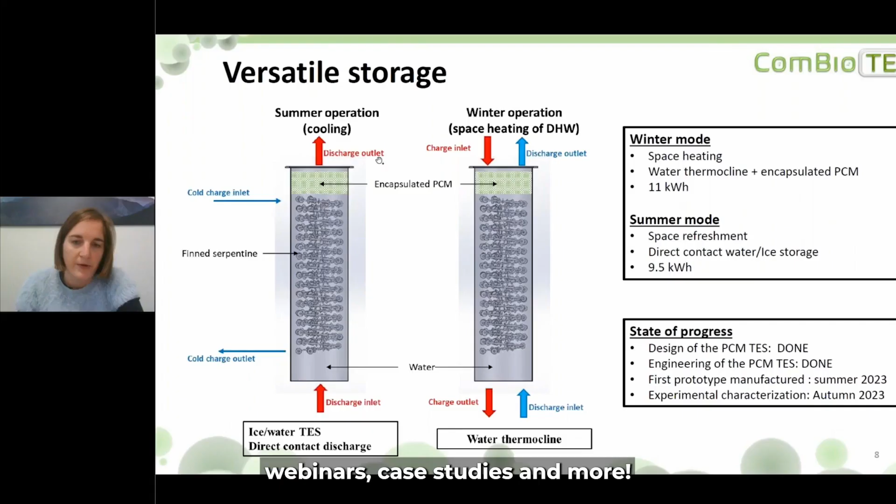Every month we focus on a topic that is key to making Europe's buildings as energy efficient as possible. Exploring that, you can find the latest content such as expert talks, webinars, case studies and more. From architects and engineers to academics and policy makers, we've got you covered. Build Up brings together thousands of registered members to reap the benefit of Europe's collective intelligence on all aspects of energy efficiency and renewable energy in buildings.

The Build Up portal benefits from the expertise of our ambassadors. Drawn from industry and academia, the ambassadors bridge the gap between EU and national level and help shape our editorial content. Want to promote your work? Build Up disseminates your research, projects and events through a variety of channels.

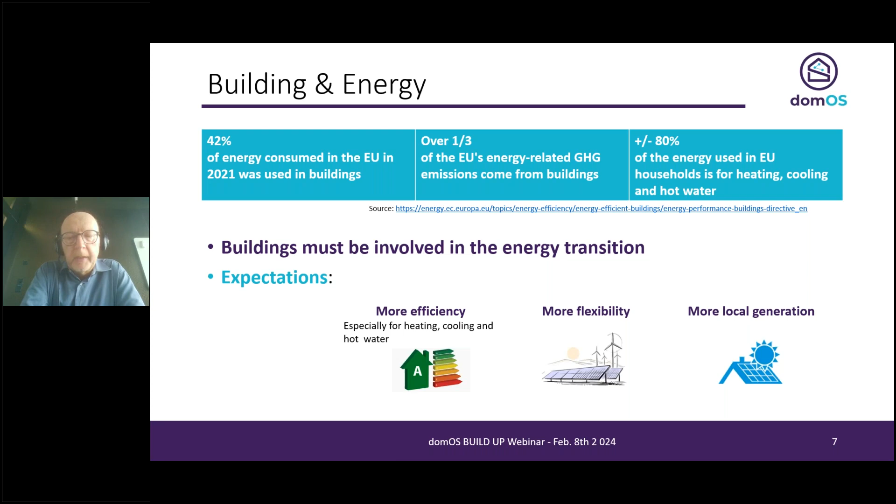Of course, smartness and digitalization is not the whole solution to improve the performance of buildings. Regarding efficiency, of course you can do a deep renovation, but with some smart services you can get significant results in the shorter term and with less investment compared to deep renovation. Buildings can also become more flexible. Flexibility means that we need some kind of conductor organizing local generation, consumption, and storage among the big consuming appliances and producers. And of course, regarding more local generation, this is not an issue for digitalization.

But smart services for efficiency and smart services for flexibility are issues related to digitization.

So in the domOS project, we had two main axes. One relates to the development, prototyping, and test of energy services for energy efficiency and for flexibility. I do not address these points as we have one session for each of these points. And the second axis of the domOS project is technology.

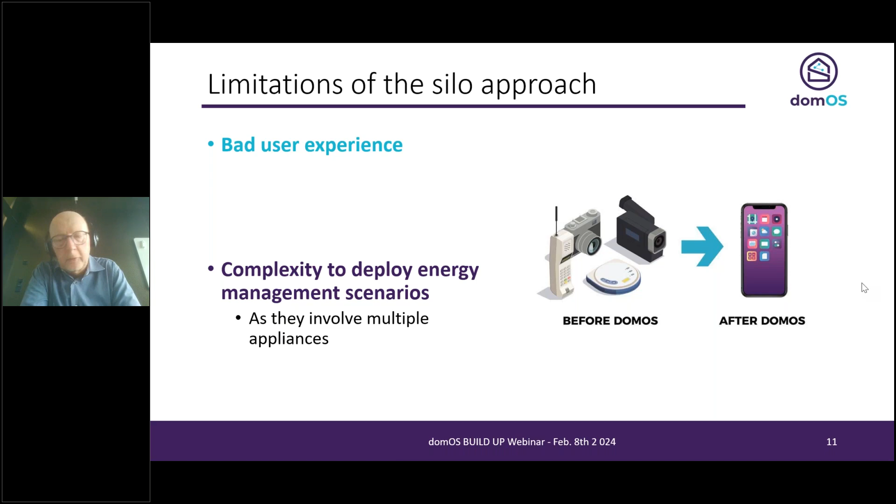Well, what is the limitation of the silo approach? Basically two. First, there is bad user experience, as you have to deal with many applications. And also many services—imagine self-optimization of self-consumption—require the involvement of multiple appliances, and with a silo approach this is not possible. Here you see an example of what we intend to do. We intend to make the smartphone revolution for buildings, to make it simple.

So what we did: we defined a mediation layer between the digital appliances and devices in the building and applications for energy efficiency, flexibility, prosumer information, and so on. By doing this, the applications would interact only with the middleware domOS layer, meaning that in the long term we could have an app store where building owners and building operators could install applications on their building and let them work directly, with the application having no idea about the underlying hardware. Like today, a computer program has no idea of the model of the printer when you want to print a document.

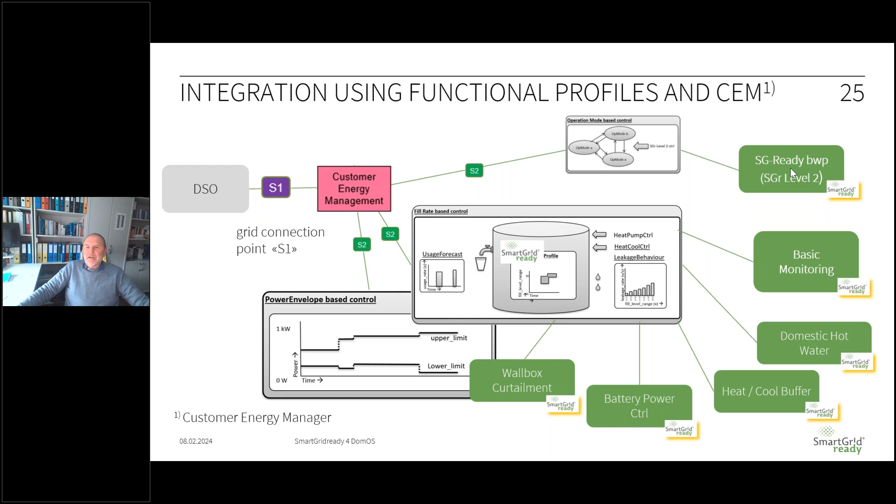To go a little deeper how Smart Grid Ready works, we create devices with functional profiles as shown before, and we create a machine-readable interface description of, as example, a Modbus device. This machine-readable external interface description can be printed in PDFs, can be downloaded, and with our open source software code, we offer that in Java and Python. You can create automatically a device instance for accessing setters and getters for each data point.

And we plan to combine that with domOS. domOS is also enabled to use our external interface description. Could you press the library Smart Grid Ready link, please? Yeah.

You are now in our library. It's library.smartgridready.ch, and you see an example heat pump of Hoval. And if you could be so kind to only let data points being visible, and deselect the left buttons, the blue buttons, please, little bit.

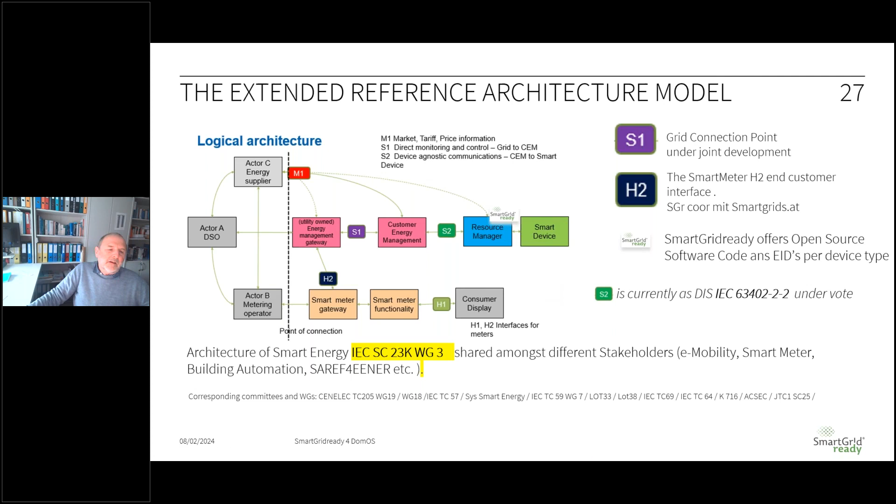I just mentioned SAREF for Energy. It's an ontology created by ETSI, commissioned by the European Commission, and they make tags for appliances, for agriculture, for energy, for smart grid. This smart grid part is connected through the S2 being listed in SAREF for Energy, and we can add plugins to this kind of listing to be part of the SAREF for Energy definition.

The contractor is the European Commission, and the political consequence will be that SAREF will be part of the Code of Conduct for smart appliances. Code of Conduct means manufacturers will be motivated by labels to follow this Code of Conduct, similar to the A, B, C energy efficiency labels we support all over Europe, including Switzerland.

Smart Grid Ready plans to become a plugin for flexibility in this SAREF for Energy, and this may be a future project we could participate in with the European Commission.

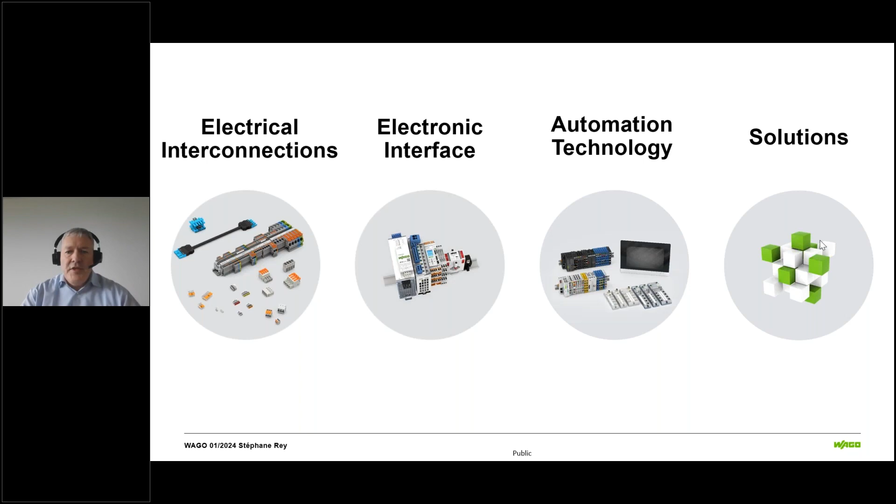From the business unit electronics, we have products like relays, power supplies, electronic circuit breakers, and automation products used in machinery as remote I/O, but also with PLCs and HMI in smart grid and building applications. Last but not least, the business unit solutions builds ready-to-use solution applications like an EDM, an energy data management system.

Let's get back to the subject of the presentation, the industrial deployment of smart services in smart buildings. Our project consists of developing an EMS, an energy management system, for single-family homes with PV production and large consumers such as a heat pump or an electrical vehicle charging station.

The challenge in this kind of project is not technical complexity, but rather the numerous device variants, their deployment on a large scale, and the maintenance of the installation fleet. If we think about thousands of buildings we want to manage, it's a real challenge. The main idea of the project is to use its own photovoltaic production to run the heat pump and recharge electrical cars—in short, a self-consumption solution.

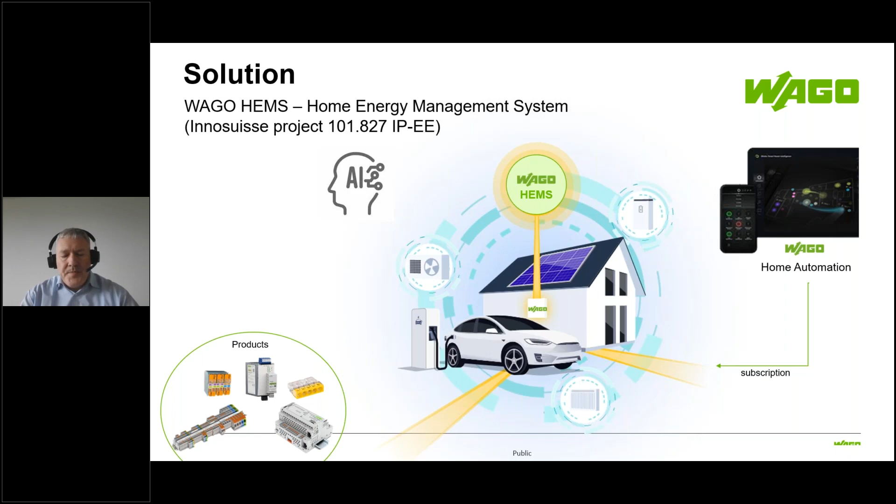Our product vision: the project was launched with the vision of becoming a future provider of a service hosting platform for smart building and smart grid. In a first step, our target is to bring an MVP, a minimal viable product, to the market that will increase self-consumption in small buildings. It's what you can see on the left side.

In the future, we can imagine offering other services, and we have many ideas in mind. You can find some of them on our roadmap here: self-sufficiency application, EV load management, demand side flexibility application, etc.

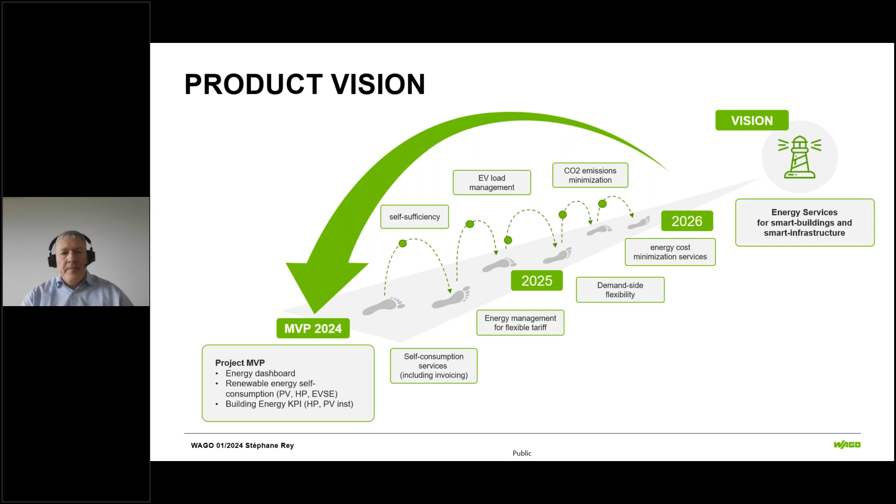I'm going to go a little bit faster and suggest you skip this slide. It shows the current status of our project, and you can comment on it later if you want.

To begin with, here's the topology of our solution. On the field level, you can find appliances like the heat pump - here, as example, Stiebel Eltron heat pump, a PV inverter, as example of Fronius inverter, a WAGO MID meter, or a charging station here, as example, a wall box from Zaptec.

In the middle, these small pieces of hardware is a WAGO CC100. This product acts as an edge device between the field and the external world. On the WAGO controller, device drivers are running for all appliances lying on the field level. The WAGO Linux controller is a single point of information for cloud application, cloud services, and local application, like dashboard or self-consumption algorithm, etc.

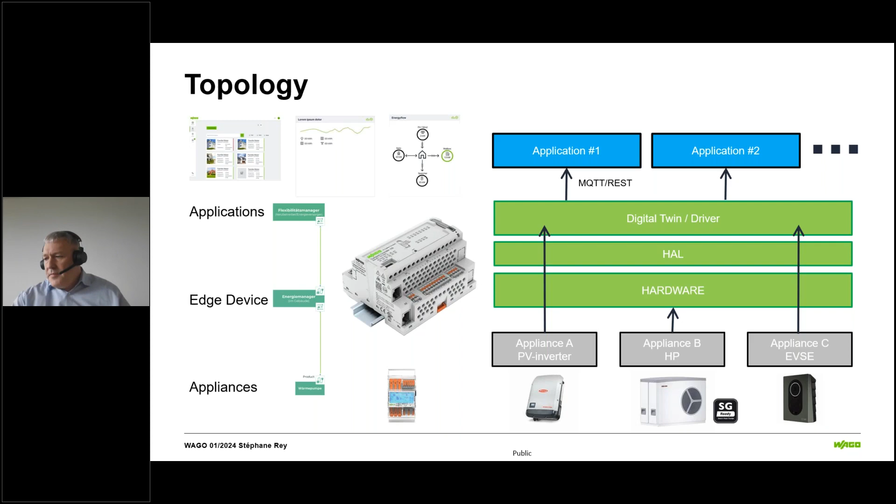Next slide. To simplify and industrialize endpoint deployment, we develop a technology that uses a common information base, the building description. It's the same idea as Frederick showed in his presentation.

Thanks to Docker, we are enabled to deploy specific containers for each type of appliances or device. You can have a look with the arrow that goes to the right side. The building description is used not only to configure appliances, but also applications, and that's the arrow that points to the left side.

The use of building-specific data, like GPS coordinates, the number of rooms, the number of floors, are important data to customize the application for each customer's needs.

To summarize, the building description is a key to a successful large-scale deployment of building drivers and customer applications. I'm already at the end of my presentation. I was a little bit fast.

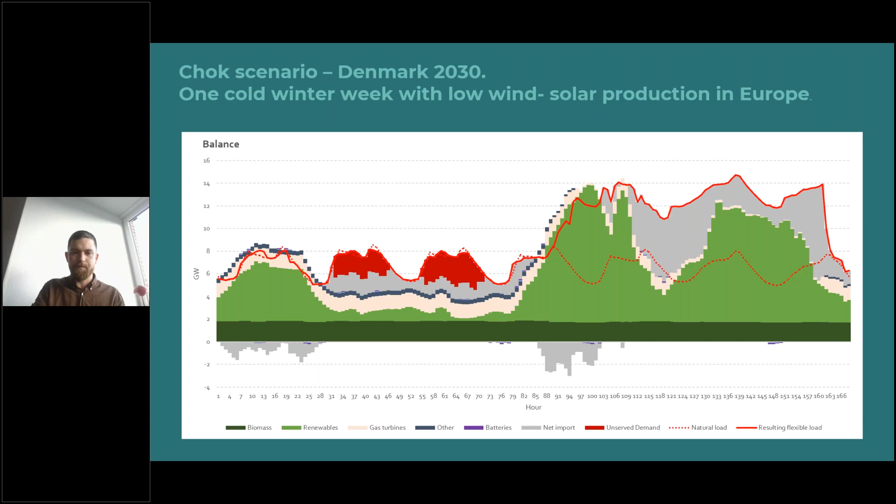What happens from a security of supply perspective if we turn the knob on flexibility? This is a simulation of the same scenario, just with flexibility turned on. You can see that there is less unserved demand in the energy system—the bright red chunks are decreasing, and that's a result of 10% extra flexibility from companies and industry.

They've become more price flexible. There's 25% extra flexibility from data centers and their power consumption, and vehicle-to-grid capabilities where 20% of each EV is capable of using vehicle-to-grid. This shows that if you just turn the knob on flexibility in these simulations, we will have a more secure supply of electricity in the system. These aren't simulations of what happens with buildings specifically, but what happens if you do something about flexibility—for example, in buildings, data centers, and vehicle-to-grid. This is an example of how flexibility is a fundamental component of security of electricity supply.

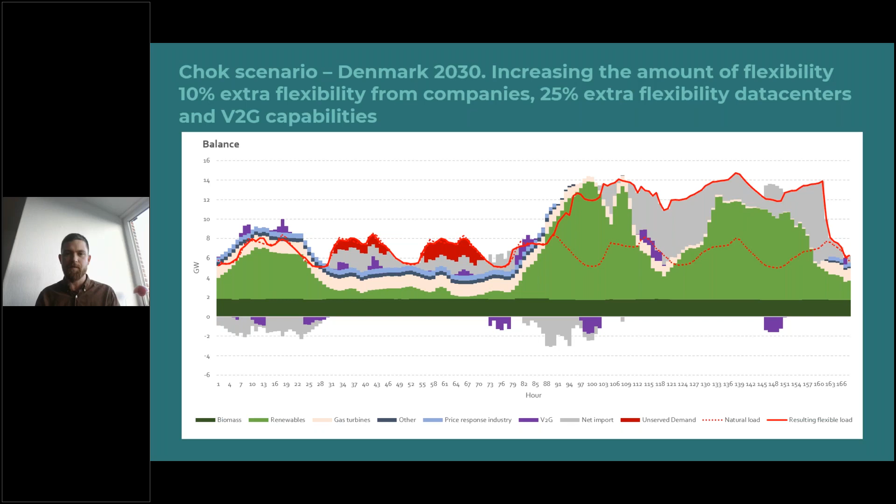So in a power system with increasing demand and fluctuating power production, we need to switch from managing power production to managing power consumption, otherwise ends can't meet.

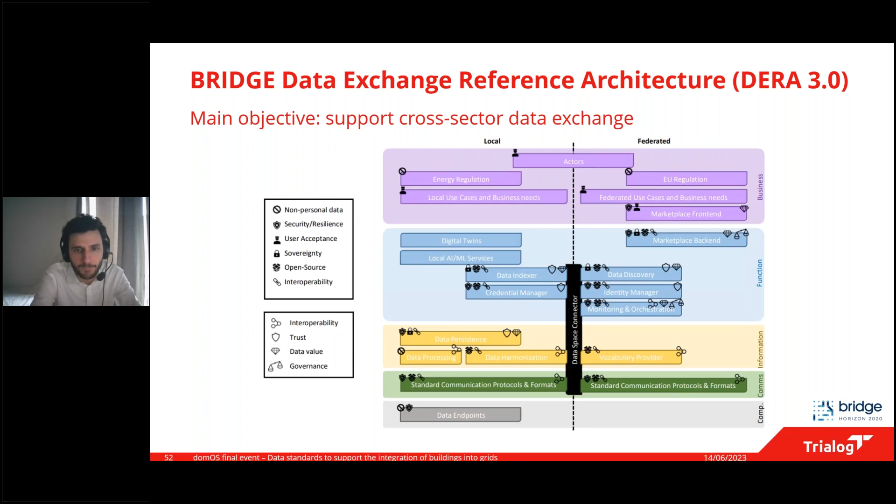Besides that, we have other initiatives. One is FlexOffer. It's already been mentioned by partners because it was used in domOS - FlexOffer is a common generic core with possible application-specific profiles to support flexibility. It's been used by more than 15 projects, starting from Mirabel, and also TotalFlex, Fever, GoFlex, and now domOS and Gift and others.

Recently we created a FlexOffer user group, about 1.5 years ago, with the objective to maintain the FlexOffer specification and promote its use. We currently have 54 registered participants. It's part of the Flex community, and we've already released the specification as open source. We're really looking forward to more people participating to contribute to the development of FlexOffer to make it an industrial reality.

When we look at standardization, we all know that there are many existing standards, and it's sometimes hard to know where to go and what is relevant. So some time ago in 2017, a smart grid roadmap was established. It's currently being updated and is freely available on the website from the IEC System Committee Smart Energy. The main idea is you have a description of the system, and subsystem by subsystem, you can click on it and get the list of available standards, as well as coming standards under development, plus SGAM diagrams mapping existing standards, so it can help you identify which standards are relevant and where to use them.

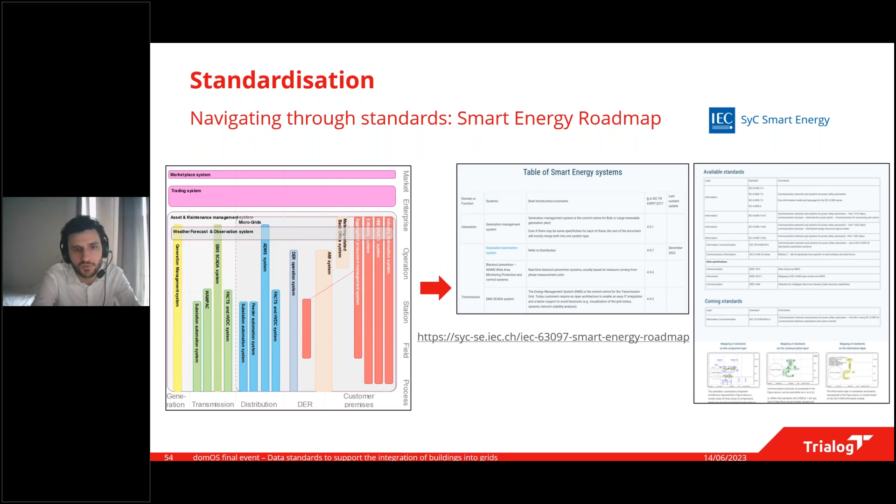We have cross-sector use cases defined, and now we are demonstrating cross-sector integrated systems. We have data models and ontologies, and now we want to achieve standards that enable semantic interoperability. We have this data exchange reference architecture, we have the data space, and this will lead to harmonized data exchange architecture and procedures. We want to leverage existing and future standards, and thanks to this smart energy roadmap, we know where to look. We also want to support industry adoption, and for that we have user groups and feedback loops from the industry and users of each technology.

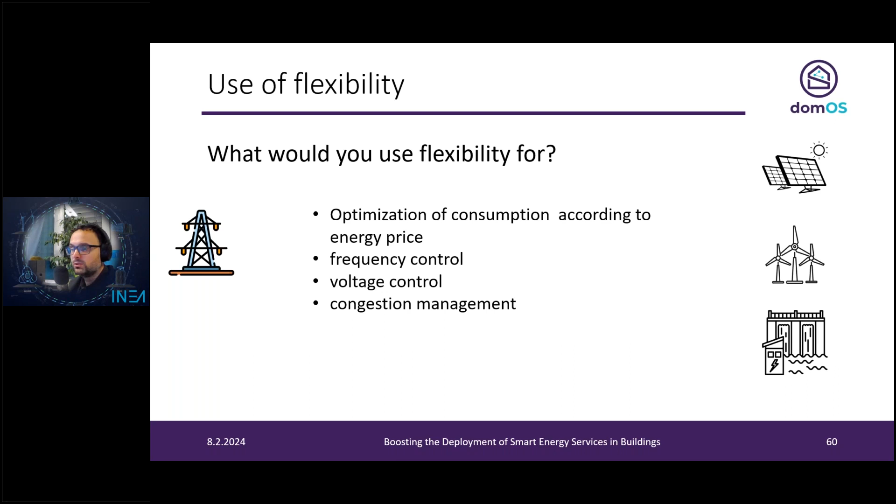Next, we need to somehow connect this flexibility. We need to communicate with it, measure it, and control it. And here comes the domOS solution really handy - it simplifies a lot the integration of such assets.

One thing to consider is the individual building flexibility is really not that big, and the IoT devices used for this should be as cost effective as possible.

Now that we have monitoring and controlling of flexible devices, we also need to somehow orchestrate them. These control devices send measurements to a flexibility agent, and combined with user settings, they generate flexibility offers - flex offers, which were also already mentioned a few times today.

Multiple of these flex offers gather in an aggregation platform. On the other side, the grid also provides its own flex offer, but with the main difference that it's not offering flexibility, but asking for it. Then the optimization algorithm tries to find an optimal solution, and based on this solution, the control devices are controlled to extract the flexibility from them.

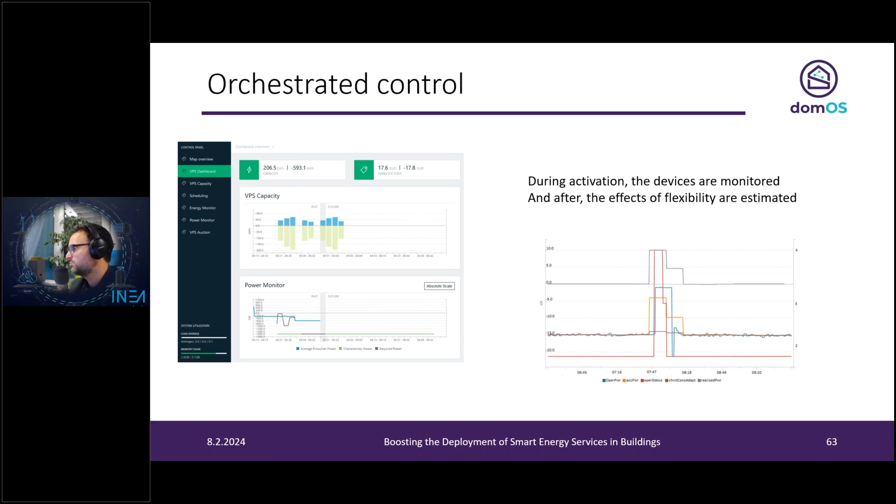Hello. Hello. Is Oliver still here? Yes, I'm here. Yes, okay, perfect.

So while we're waiting for questions from the attendees, I prepared some questions of my own. First, for Mr. Bech: what are some key future features or technologies that enable buildings to become intelligent in terms of energy management and optimization? The main focus, of course, being that we will be able to adapt consumption to production, to make this transition to control consumption. So the question is, which technologies will be the main drivers?

I can speak from a Danish perspective and from a systematic view for the energy system as a whole. In a Danish context, we expect that 1.5 million EVs will join the roads by 2030. The flexibility in the Danish context will mainly come from vehicle-to-grid capabilities. Then from district heating - we have a huge district heating system in Denmark, with a lot of district heating connections, especially in the big cities.

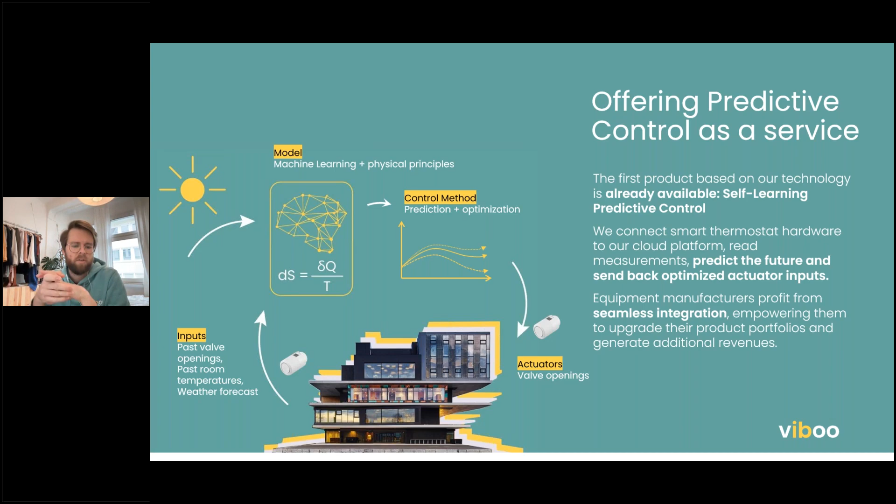I've brought two examples of buildings where we got these algorithms into work. In this building, we replaced 140 thermostats with smart thermostats, coupled them to our cloud platform, and it's now running for the third year. We are saving 30% of energy, while most occupants claim that their comfort improved or stayed the same.

In this building, we save about 6,000 francs of heating costs per year, while charging subscription costs of about 1,800 francs. So 2/3 of the savings stay with the operator of the building.

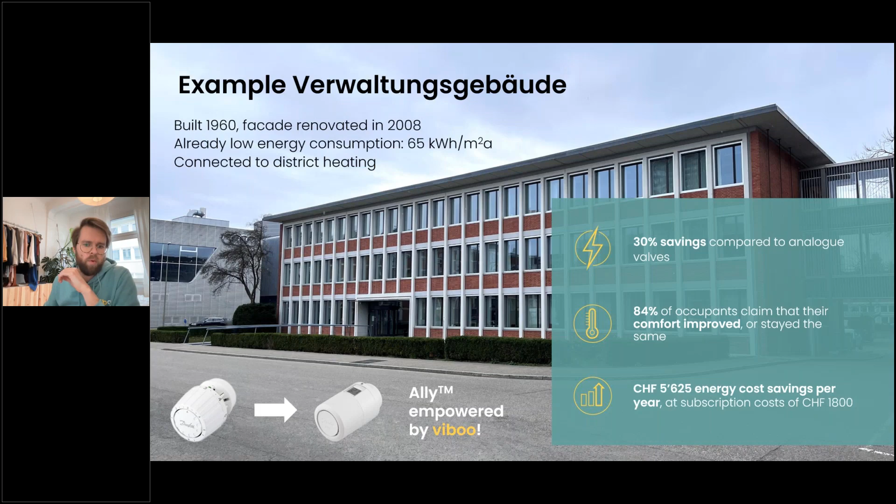So how do we sell these projects or the technology? We basically offer end-to-end projects. Together with the customer, we select the building, organize the purchase of the hardware, organize the installation—we even have our own installers for smaller buildings, or we work with partners. Then we connect the thermostats in the building to our cloud, and 1 to 2 weeks later, after our algorithm has learned the thermal behavior of the building, the customer saves energy.

These are the advantages of our technology on one slide. As the end customer, you get 20 to 40% savings in your building, while even improving comfort. Our technology also allows extended reporting—we can do reports of already achieved and future energy savings, and give the facility management maintenance suggestions. With the data in our algorithms, we can analyze whether the hydronic balance is correct in a building, or if there's something wrong with the supply temperature, and many other features.

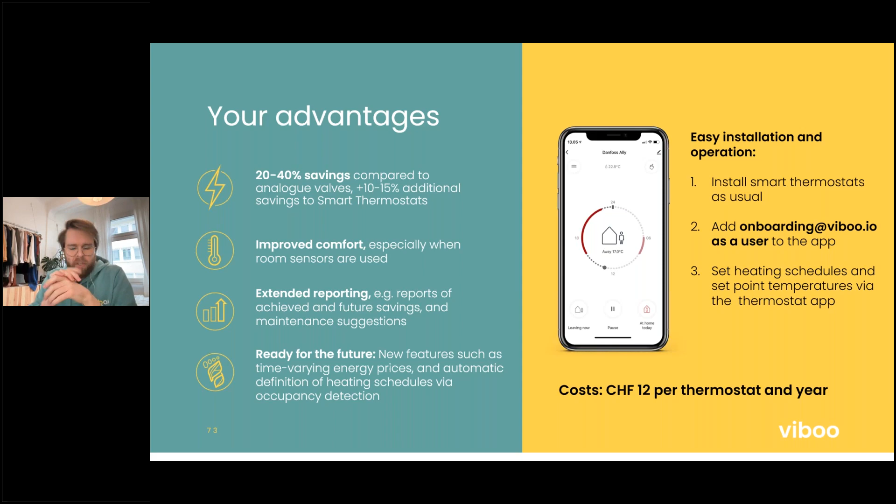We are also ready for the future. We've heard a lot about flexibility and flexible buildings already in the presentations before. We can use our technology to provide flexibility with buildings to the grid without hurting the comfort in the building, because we understand exactly the thermal behavior of the buildings. So with our technology, we can maximize the flexibility while keeping the comfort, because our models know exactly how much flexibility can be offered in order for the comfort to stay in a certain range that we or the customer can define.

So with that, I think I'm in time, already at the end of my presentation. I'm looking forward to the discussion at the end. Thank you.

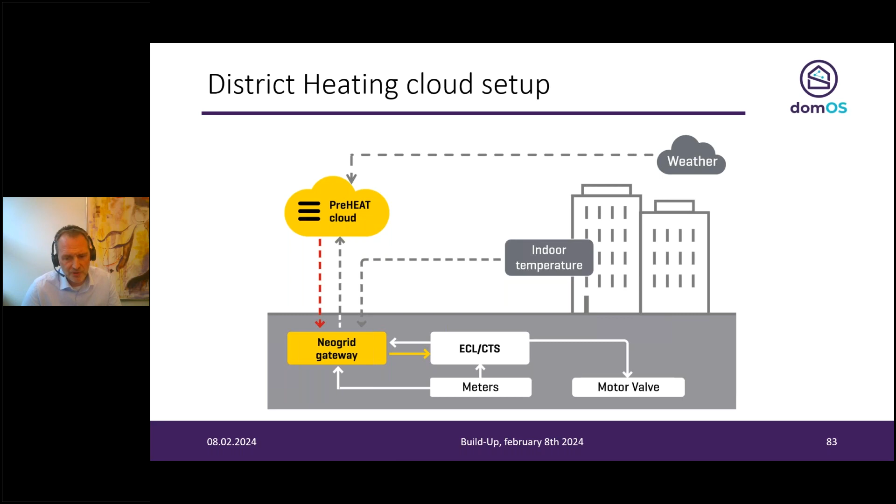Our primary segment is the social housing sector, but we also provide services for the municipal sector - institutions, schools, and kindergartens. We also focus on complex buildings, where we have ventilation systems, cooling, and room heating playing together. Our focus here is to deliver the optimal indoor climate at the lowest cost.

Yes, it worked. Via data, we learn how buildings consume energy. We do that by measuring the amount of energy delivered to the building and the indoor temperature that the energy translates into. Then we have the outdoor weather of the building, and we train a thermodynamic model of the building to see how it consumes energy. If we then have a weather forecast for the next 24 hours, 48 hours, whatever, we can forecast how much energy we need to put into the building and at what time, in order to achieve the desired indoor temperature.

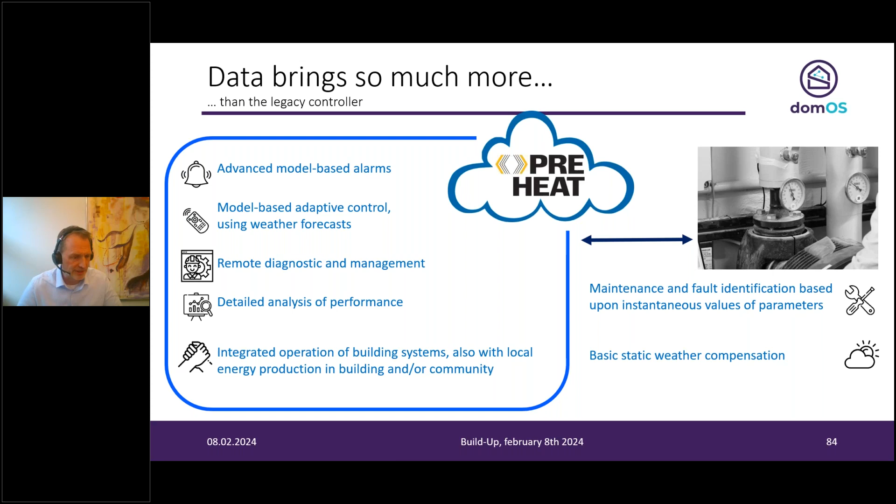Compared to standard heating curve controllers, this approach has superior results. For a given building, we constantly document the performance of our controller. Compared to a baseline without our control, our service provides energy savings in the range of 15%. On top of that, we provide a number of KPIs regarding how the building is operated and how it's performing, but also with a focus on the cooling and the return temperature of the district heating system, which is important for the district heating companies.

We are an add-on to the existing building equipment, the BMS controllers or other kinds of controllers. That means we reuse as much as possible in order to lower the installation cost.

Typically, we obtain savings, as I mentioned, between 10 to 20%. We typically see 5-degree lower return temperature from the building back to the district heating network. And our installations in total have a return on investment of 2 to 3 years.

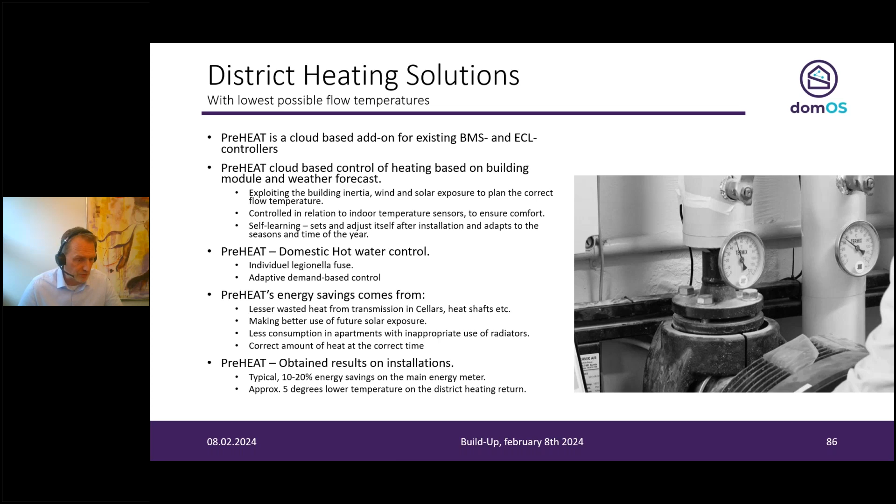Within the domOS project, we extended our service with the district heating companies, adding a local mixing loop supplying a cluster of buildings. Transmission temperatures were dynamically controlled and lowered from 80 degrees to 55 degrees centigrade, minimizing the distribution circulation loss, with the aim also to investigate how buildings were performing in the future low temperature district heating system.

I will now switch to Christian, who will take this to the next level.

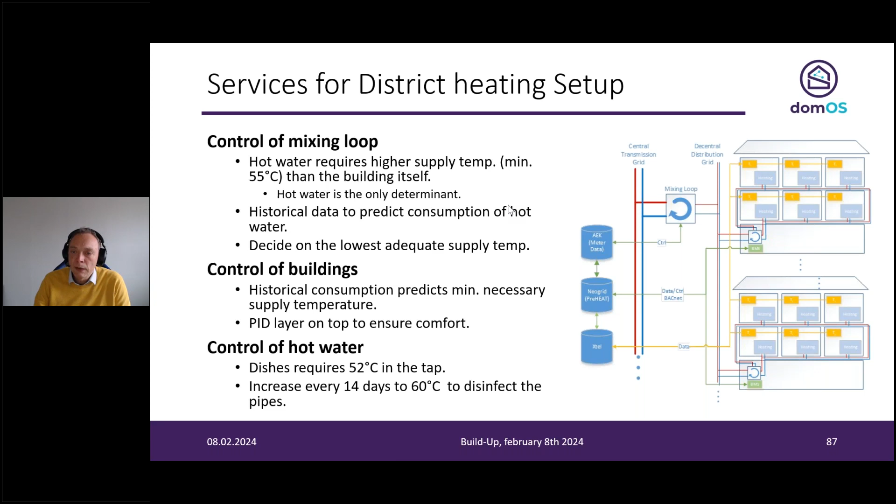I hope you can hear me, and hopefully I'll be able to control the screen. As Henrik just mentioned, I'll shortly tell a bit about the results from this domOS project that we worked with.

So for the tenants, what did it mean for them? They had a decrease in energy consumption and experienced a lower tariff for the district heating system.

For us as a district heating supplier, we experienced this lowering in the supply temperature, which also led to a decrease in energy demand. It increases the lifetime of our service pipes, and it's really optimal for the green transition, where we need to change from fossil fuels to renewable energy, looking into a more electrified district heating production.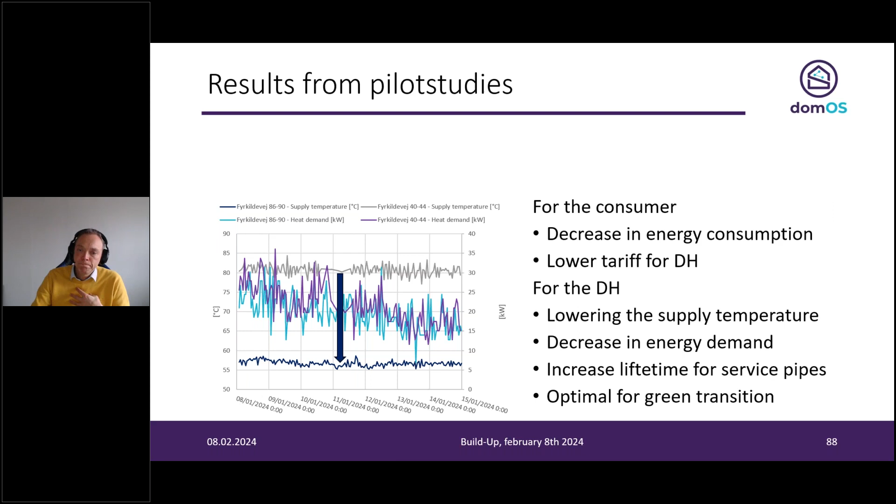If we look into what this means for us as a district heating supplier, just by reducing the temperature, we experienced that in this area, with around 500 meters of pipes and service pipes, we could reduce heat loss from our district heating system by around 20% when reducing from 80 to 60 degrees.

If you extrapolate this result to the entire grid, we find that for each degree we can reduce the supply temperature, we actually reduce the heat loss of our system by 1.1%. So just by lowering the supply temperature by 1 degree, we can save a bit more than 3 gigawatt hours. And of course, if we lower it by 2 degrees, we can save double this amount.

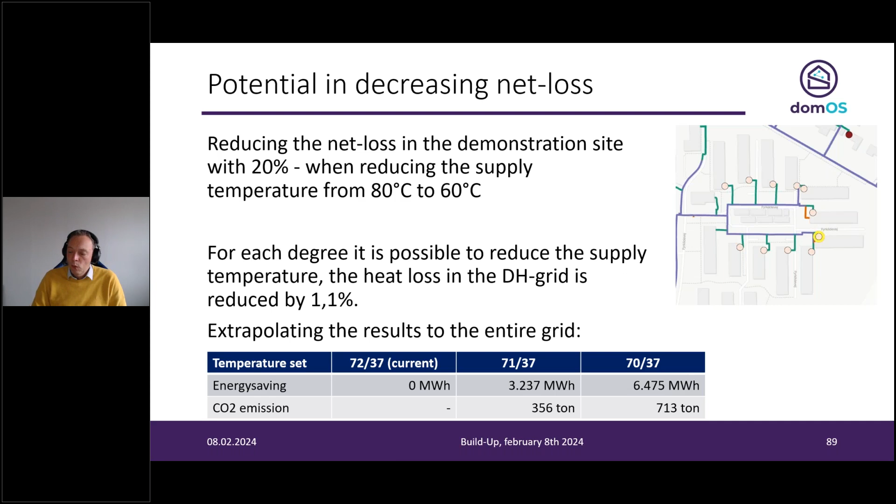So how are we able to do this? Looking into the future, how can we use the flexibility in our district heating system? We look into how to make smart production, smart grids, and smart buildings, and where to integrate these - where we have the coherent places where we can find something beneficial for both the consumer, the buildings, and us as a utility.

Today, right now, we experience the energy savings. We have remote read meters, so we know what our consumers use every hour. We rent out district heating units. So tomorrow, or in the next day, as Henrik told, we will be able to remote control these units. We can use AI to figure out how to control them. We will be able to integrate the building and building designs into the distribution system, into our district heating system, and look into delivering comfort instead of just selling kilowatt hours and hot water.

Someone asked about how we can reward this flexibility in the system. This is probably some years ahead, but when we look to the district heating system being 100% renewable and electrified with lower temperature, we look into the possibilities of time shifting the consumption at our consumers.

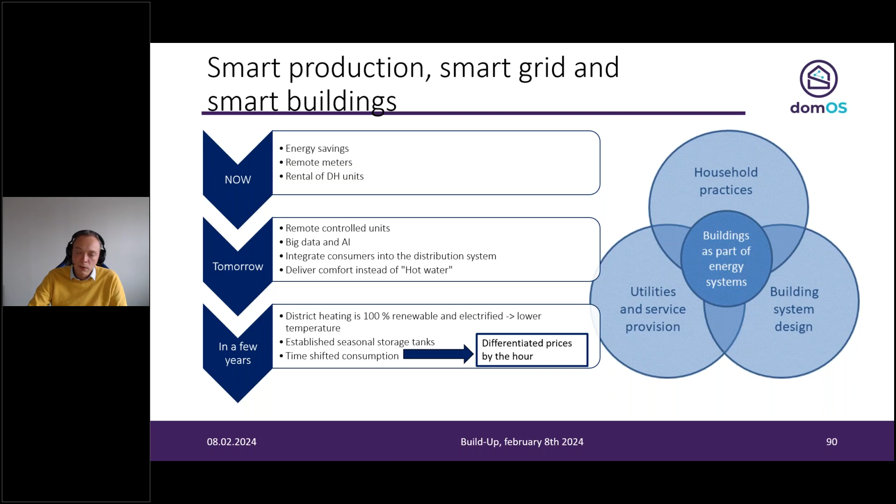How do we integrate this into our products? At the moment we rent out district heating units, and if we can send a signal to the district heating units, or to a company like NeoGrid, we can time shift consumption - for instance from 6 to 9, when people take a shower and close the radiators - and move that consumption to before and after, allowing us to peak shave the consumption and remove some of the peaks.

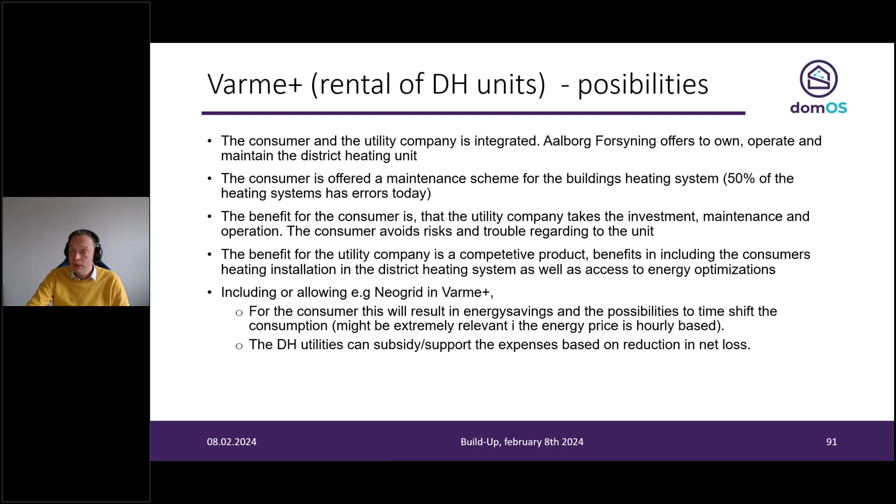The peaks are very expensive for us, both to supply and also to build the production sites needed to supply this peak demand. That's everything from me, and I'll give the word to Yves, who will have the last presentation.

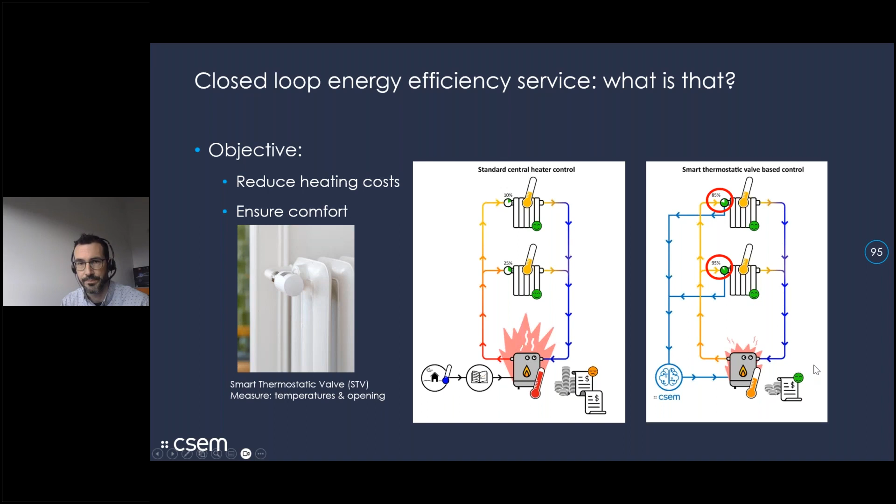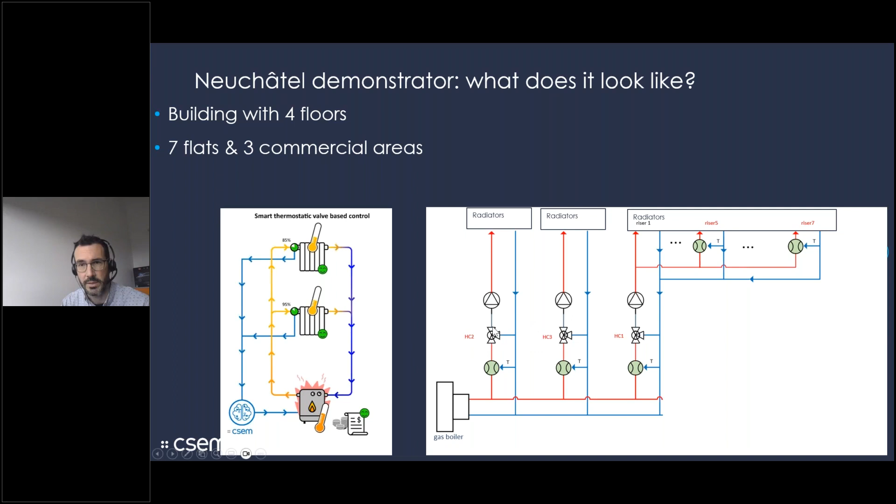In domOS, where did we test that? It's a test site in Neuchâtel. I'll try to link what I've shown before with how the test site looks. It's equipped with one big gas boiler to generate the heat, and the interesting feature is it has 3 independent heating circuits, which allow us to compute for 3 - it's as if there were 3 buildings connected. That makes our test case way more interesting because we get 3 buildings for the price of 1, and all that feeds around 70 radiators.

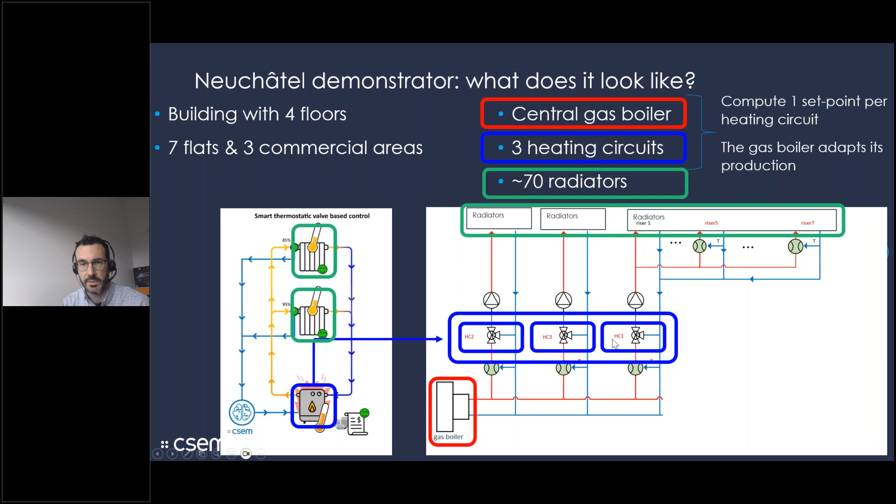It's a quite big building with 7 flats plus some commercial areas on the ground floor, with one big heat generator for the 3 heating circuits. We compute set points or values to be applied at the heating circuits, and then the gas boiler adapts and lives its life as it should to satisfy the needs of the heating circuits.

What are we using to do that? Most important are the smart thermostatic valves - we started with these, from the brand Hora. Then we moved to another one, the Vicki, which has the advantage of talking over another network that doesn't require us to add gateways, which are not always convenient. So we can now live without this.

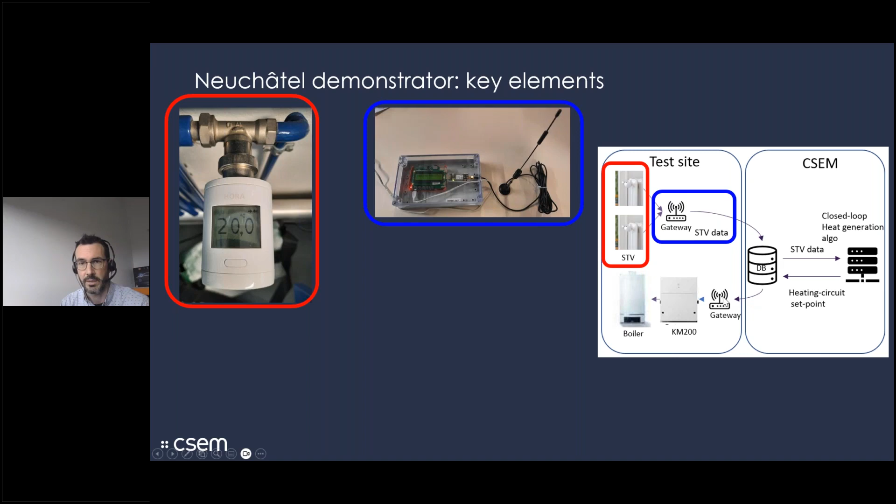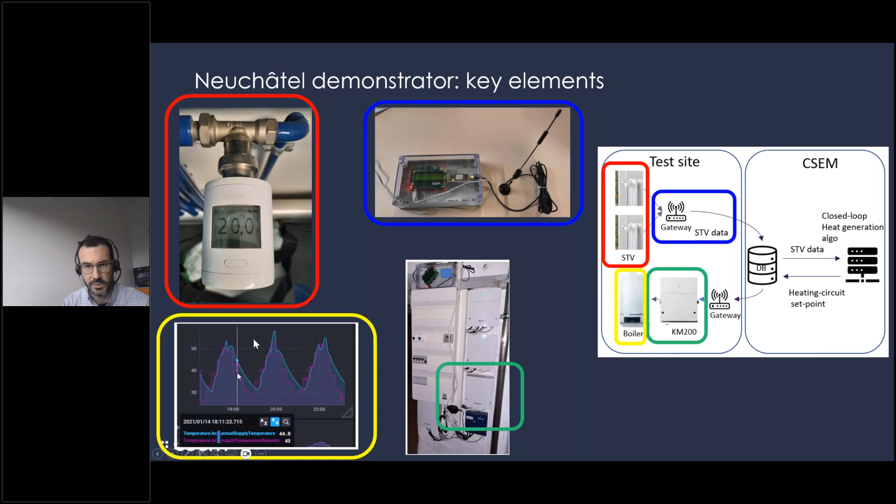This information then goes to CSEM, where we do the math and send it back to the gas boiler. In that case, we had to install a small gateway to talk to the gas boiler. Here's a small print showing that we can actually send commands to the gas boiler and it reacts as it should - that's always a good sanity check to make sure we can actually do what we want.

Then, what did we learn during the project? So these are results that we generated during the 21-22 heating season. And all the plots that I show have the same logic.

On the bottom axis here, you see the average outdoor temperature over one day, so each point is one day. The red is the baseline, operation as usual. And the blue line is our domOS solution, or in that case, the closed loop energy efficiency.

Here we see the supply temperature that would go to the radiators, and for riser number 3, heating circuit number 3, it was decreased on average by 5 degrees quite consistently, and people were still happy. So I put it as green, that's what we expected.

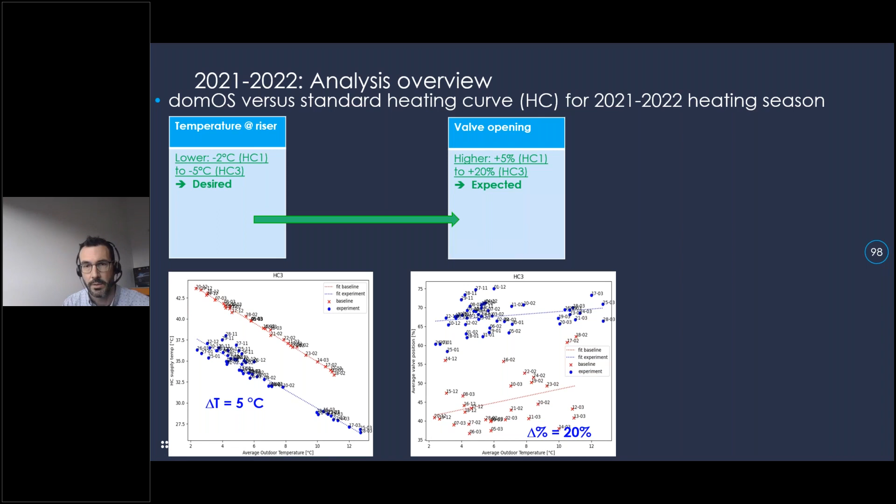Then if I move closer to the radiator, this time it's not temperature I show, but the average valve opening for a flat, or actually all the flats connected to that loop. The opening of the valve went from like 40-something percent on average to 65. That's also something we wanted to see, because since the fluid is less warm, the valve needs to be more open to throughput the same amount of heat and keep people happy inside.

Then the last thing we saw is that the energy at riser level was equal for the two risers, which is also not surprising, since at the end of the day, people still need the same amount of heat to be happy.

Our motto is that we can drive at a lower temperature, so we have a better efficiency at generation. The good thing is that on riser number 3, we even had a decrease of net energy of around 13%. I put it as not expected, because the energy should be the same, but actually the insulation around the pipe was so bad in that case that probably by lowering the temperature, we drastically reduced the losses in the piping, which probably explains this unexpected saving on this riser.

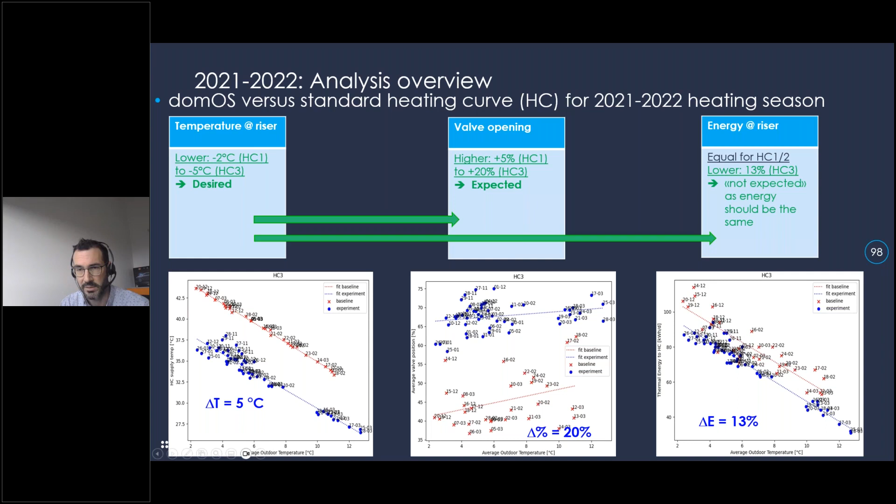So from this, I can already conclude, deploying is really fast. Changing these valves takes literally less than a minute once you know how to do it. The way the algorithm operates is exactly what we want to see, meaning lower temperature at the riser level, and the comfort is not impacted.

Both, we didn't get any complaints, and also if we check quantitatively, we don't see a reduction of the measured temperature in the room. So we were very happy with that.

So we submitted a patent, it's still ongoing. We're now doing this ping pong where the reviewer says, please check this, check that. And it looks, I would say, rather positive so far.

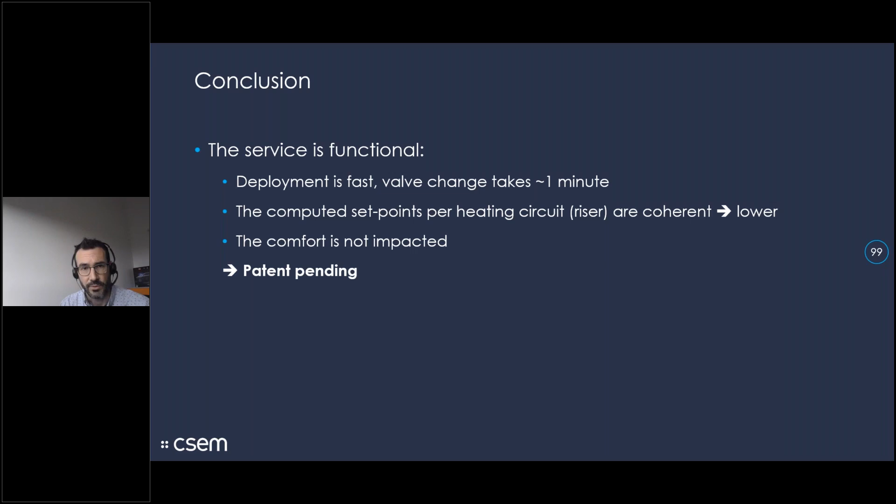And now comes the but. Normally with the good results I've shown before, I should say, great, we saved 15% of primary energy. Unfortunately, I cannot say that. And we had to investigate quite a lot.

It's actually the heat generator that the building is so oversized that even though the temperature is lower on the riser, the heat generation is still producing energy that is way too high, because it turns on for a few minutes, turns off, and it has this very erratic behavior, and it's ridiculously oversized. So that is, I would say, the downside of what we learned in that test site.

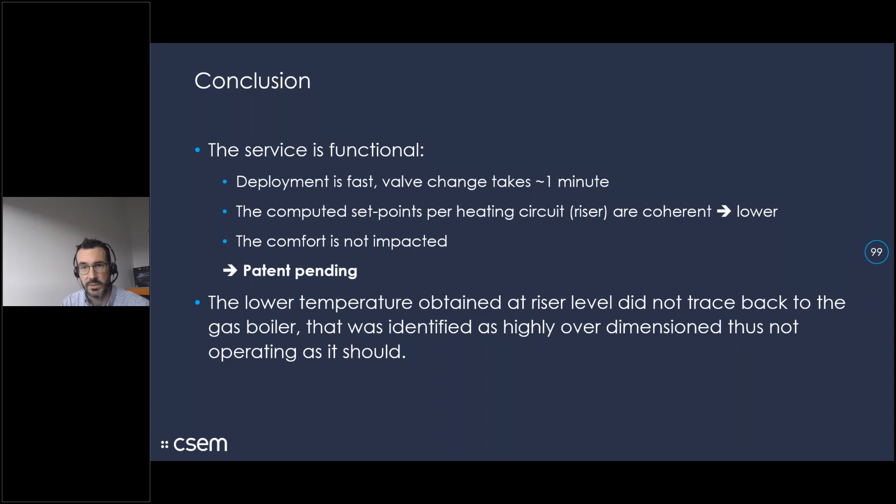The good news is that we now have tests going on in one of the buildings of NeoGrid with a heat pump, and that looks way more positive in the sense that there we see what we actually wanted to see also in terms of primary energy. And that was my last slide.